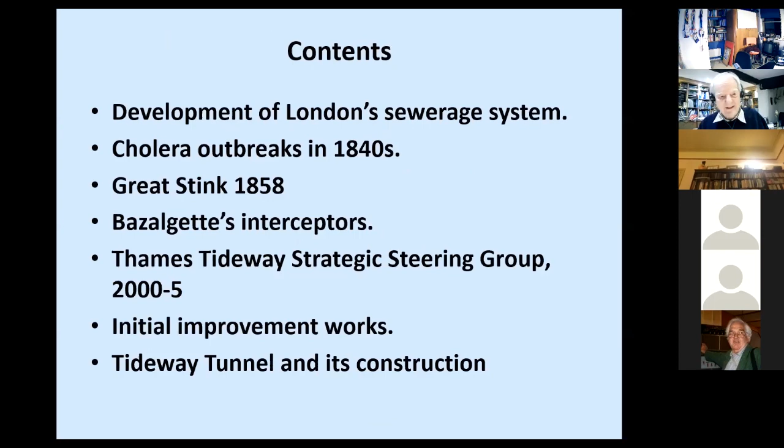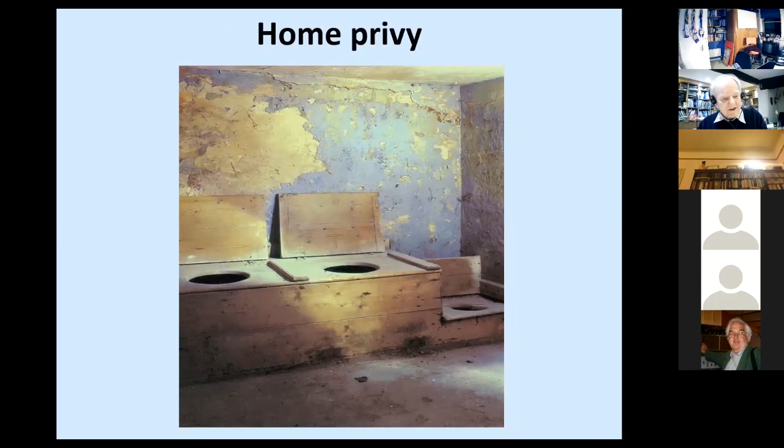In earlier times, some household waste was tipped into the street with a cry of 'Gardez-l'eau' as a warning to passers-by. A modern equivalent might be the cry of 'fore' in golf. Rainwater eventually flushed that matter away. Later, sanitation was effectively by privy and cesspits, some still in use in my youth. The solid contents were occasionally removed by hand, generally for use as manure on crops.

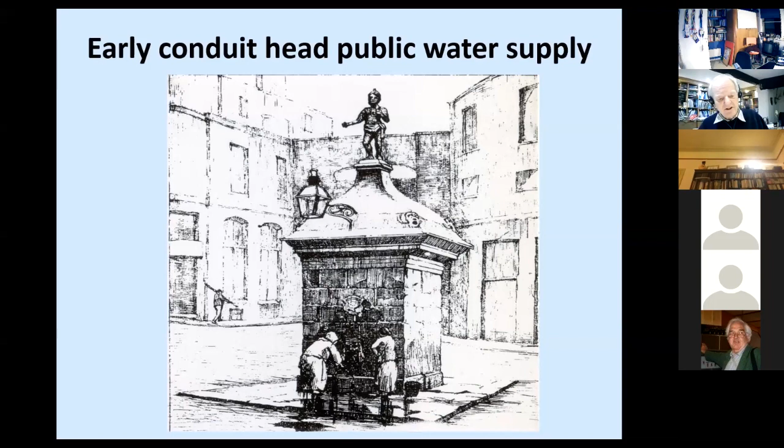Before 1800, water supply for London was generally from springs, wells, or the tidal Thames. Spring water flowed by gravity from a spring on high ground, such as up by Highgate, to a conduit head in a public place. Those who lived at a distance from the conduit head paid water carriers called caddies to bring water to them.

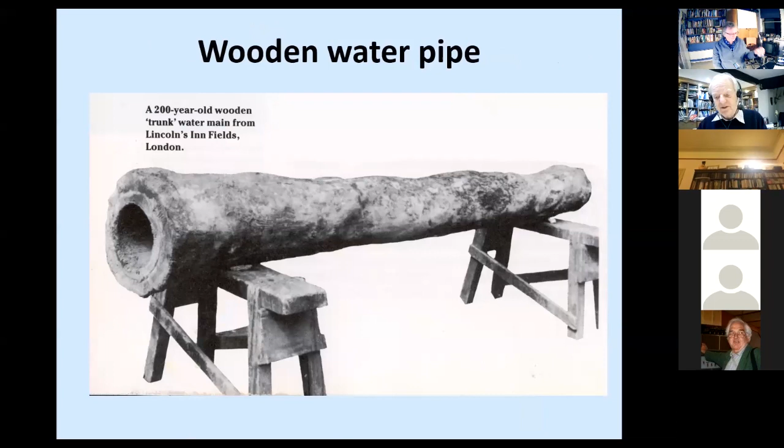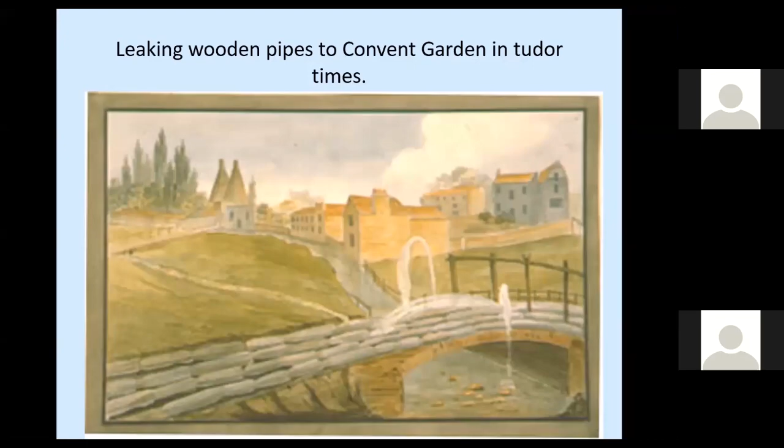By the mid-18th century, several water companies were established to provide water for public consumption. Water quality was often terrible. In 1769, Tobias Smollett remarked of London's drinking water, "The contents are composed of human excrement, drugs, minerals, and poisons, enriched with the putrefying carcasses of beast and men."

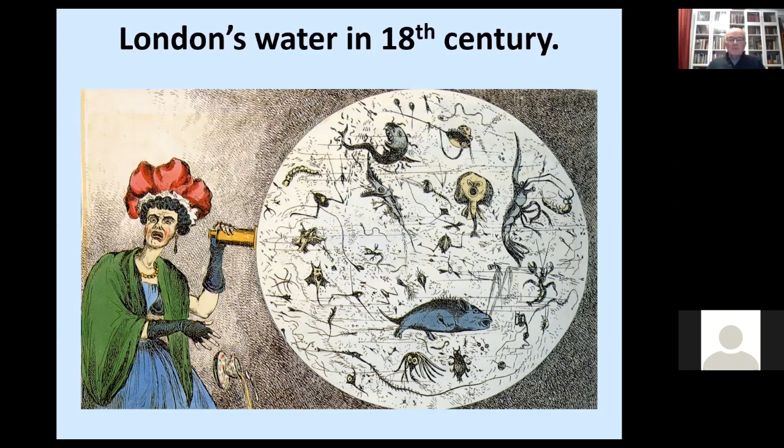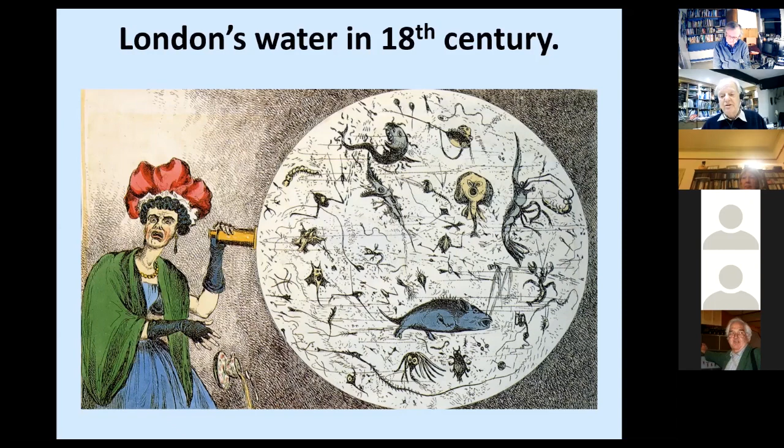In the 18th century, Britain was largely a rural country with large families, few of whom survived to adulthood. Then followed the agricultural revolution, improvements in medicine that meant many could survive longer. And then we had the Industrial Revolution. And all of this resulted in a large population increase and migration to the booming towns. The country's urban population rose from 3 million in 1800 to about 28 million in 1900. So this gives an idea of the pressure that there was on the industrial and urban town society.

The sanitary conditions in the towns rapidly became appalling. The introduction of the water closet on a large scale around 1830, seen at the time as a major advance in sanitation, had a serious impact on river water quality.

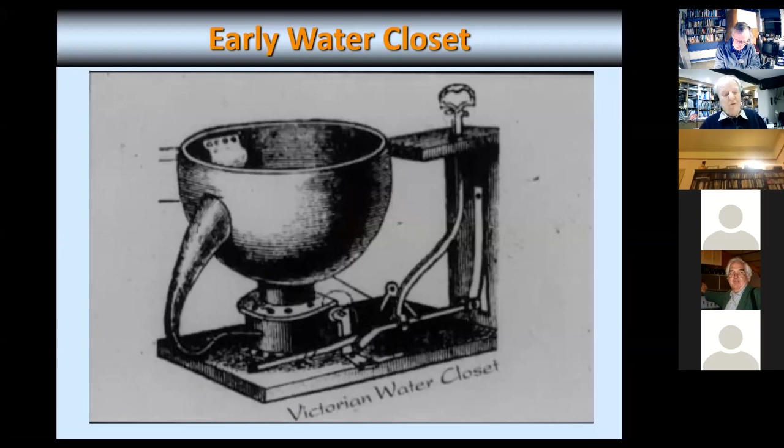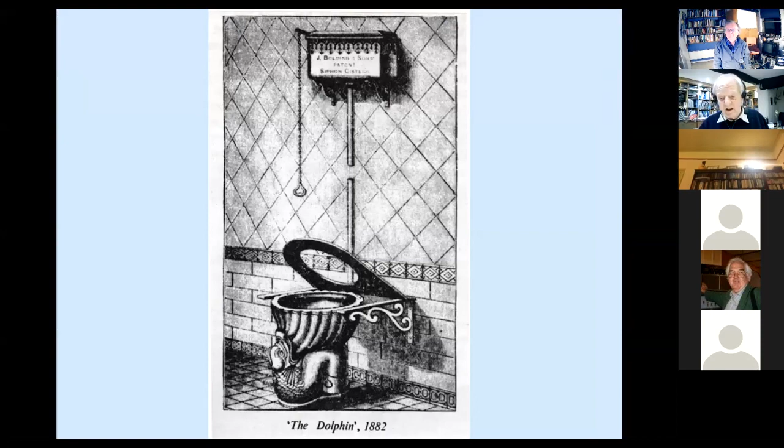At first, the water closets were basically a tank like this with a plug on the outlet pipe. Plugs were never very successful in sealing and used water. The closet contents were discharged to the cesspits, but the increase in water flow made the provision of overflow drains essential. It was not until the second half of the 19th century that Thomas Crapper developed the siphon tube system that you know today.

In 1843, Parliament made it compulsory to connect the house drains to watercourses. Whilst this removed the slops from the street, it meant foul water and storm drainage in the same watercourse. Some of these were then culverted over, hence the combined sewers that we still have today in the older parts of London.

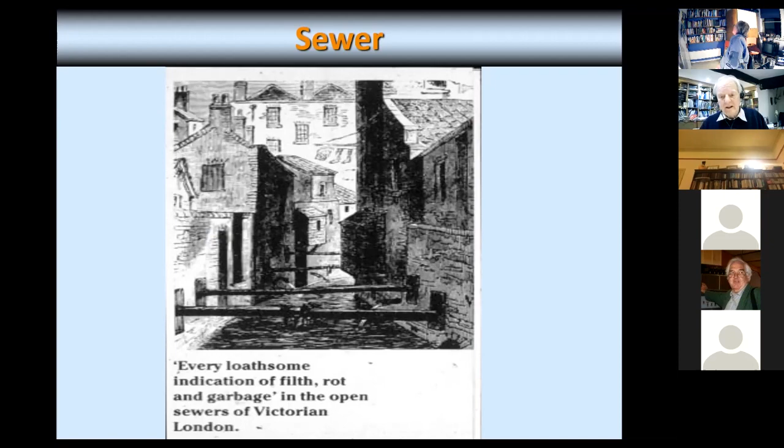Cholera arrived, an unwelcome import from India. It was considered to be carried by miasma in the air. The water closets and sewers put the bacterium into the water sources and hence into the public water supply.

In London, by the 1830s, the pollution of the groundwater and the River Thames was gross. Little of the public water supply was treated, and the spiral of urban waterborne disease began. The result was the cholera outbreak of 1832, which killed some 30,000 people in Britain.

The medical services were unable to cope with the epidemic, and it was soon out of control in the horribly insanitary conditions in which many people lived. For those that could pay, brandy was prescribed as both a preventative and a cure.

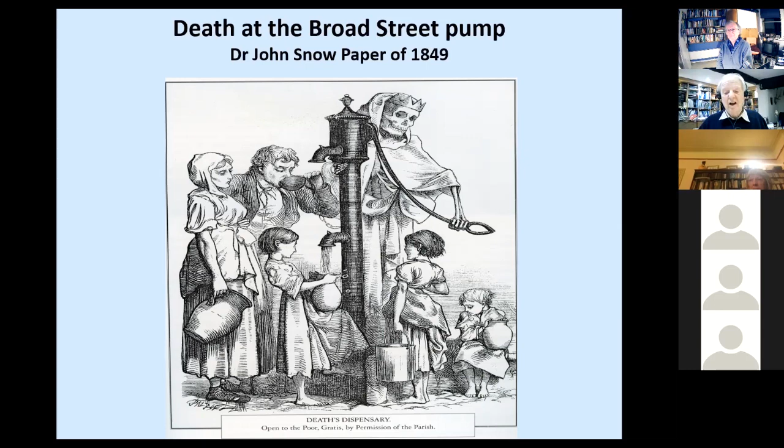Once it was appreciated that diseases such as cholera and typhoid could be waterborne, the need for a good supply of clean water was accepted and an Act of Parliament was passed. The result was that all the water sources in the Thames had to be moved upstream above the tidal limit at Teddington. And this is an image of the Hampton Water Treatment Works.

This used the slow sand method of treatment. It was opened in 1856 and is still London's largest water treatment works.

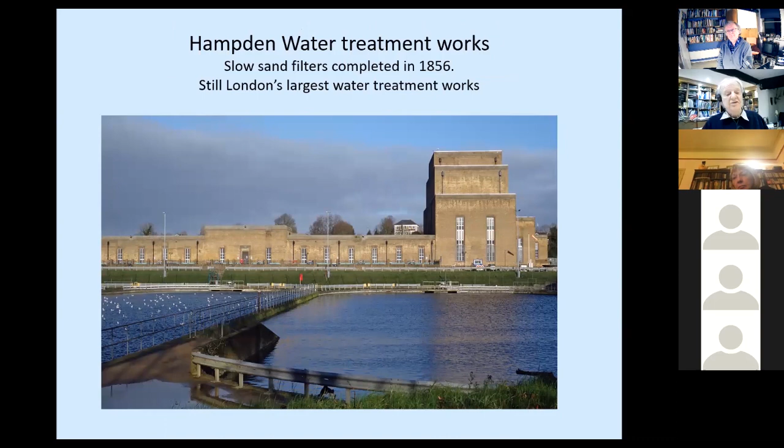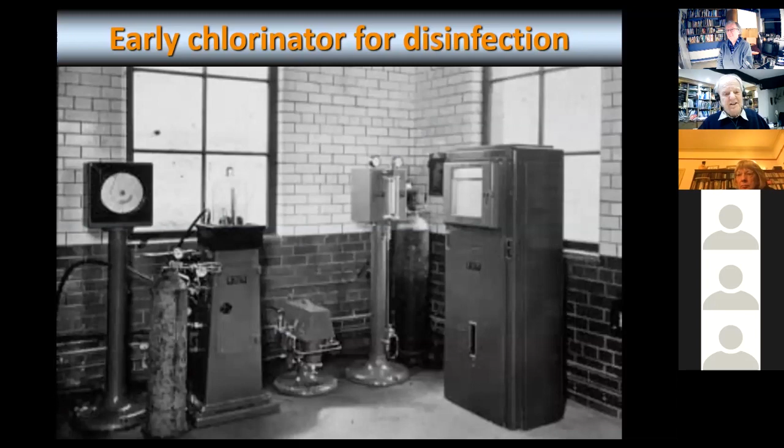Subsequently, it was shown that a small dose of chlorine could provide disinfection. And after the outbreak of typhoid, I think it was in Croydon about 1905, this became obligatory.

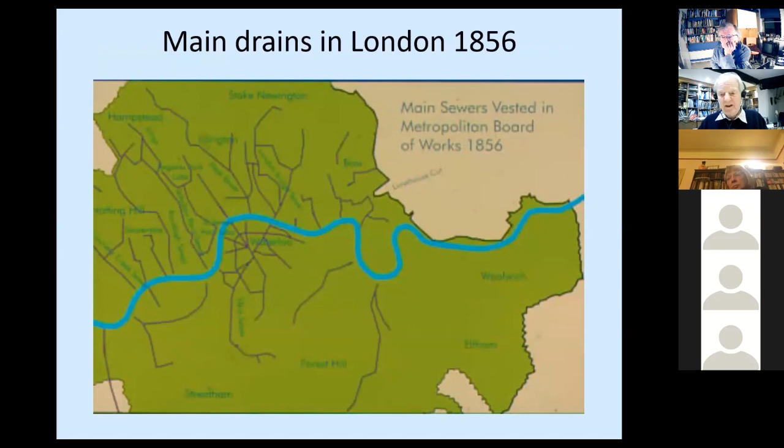Let us now return to 1856 and the many combined sewers and foul drains draining into the Thames. I think you can see many of them there, now all buried underground. With increasing urbanization came increasing river pollution.

In 1855, Faraday dropped his calling card into the Thames, but within 1 inch of the water surface, it had disappeared.

The great stink of 1858 occurred during a hot, dry summer. The tidal Thames became devoid of oxygen over a considerable length. The great stink was so strong that sheets soaked in disinfectant were hung in the windows of Parliament. Even so, it had to recess.

Joseph Bazalgette was appointed to resolve the problem. His far-sighted drainage plan was adopted. There were 5 lines of large sewers positioned to intercept the polluted combined watercourses and convey the sewage and storm drainage to large storage tanks downstream.

These were at Beckton on the north bank and Crossness on the south bank. So you can probably relate with Crossness. Someone once said to me, doctors bury their mistakes, but engineers bury their successes.

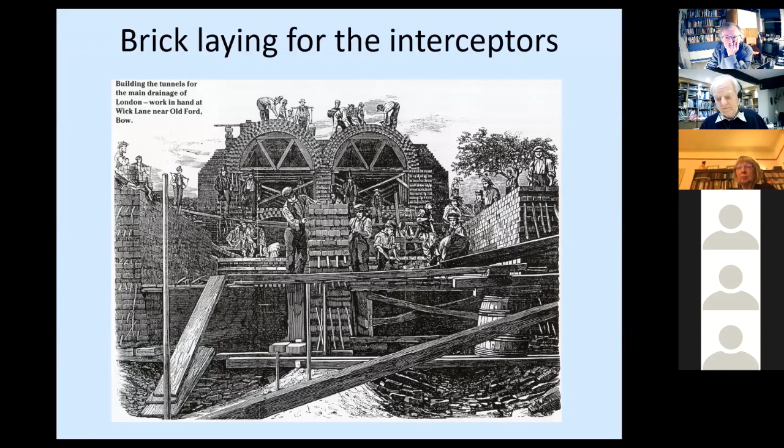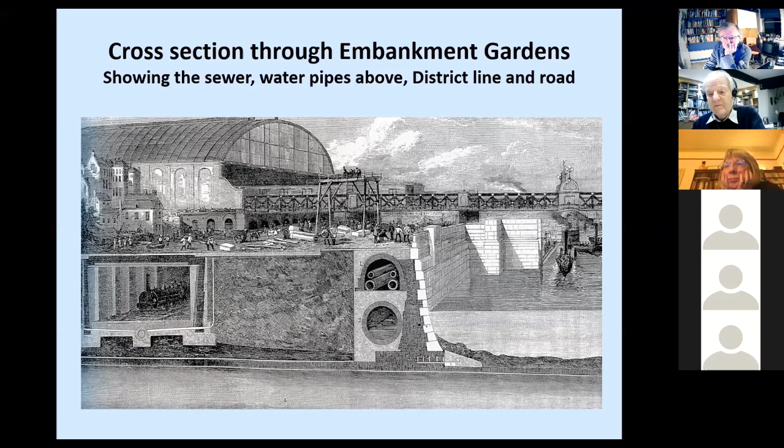Now, since about 1900, new sewers that were used to connect houses have been separate foul drainage and separate storm drainage. So we no longer have new combined sewers.

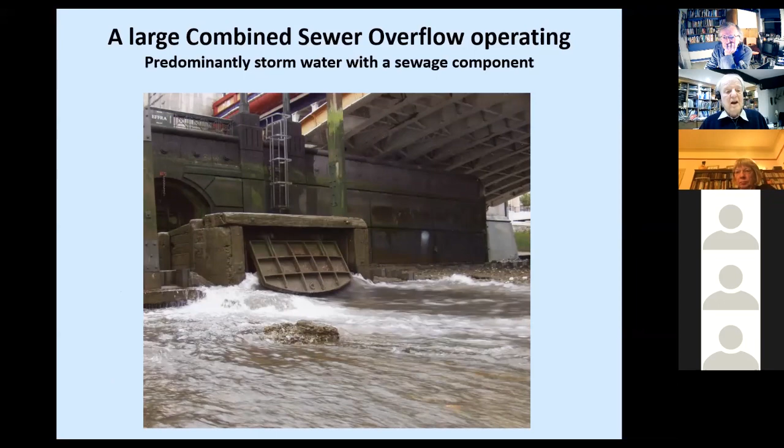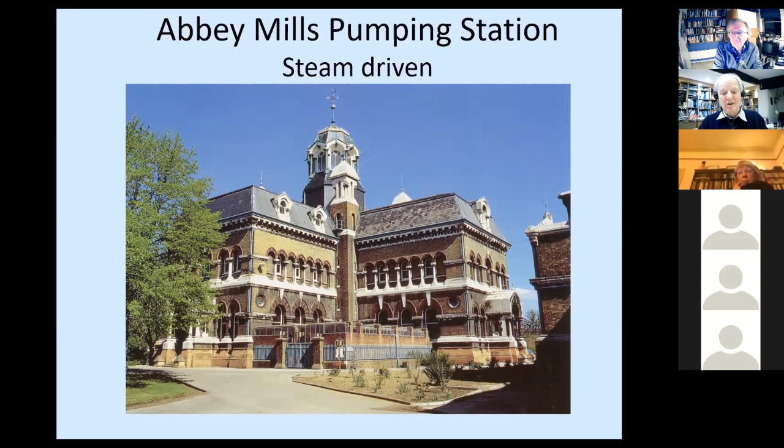Then he also found that discharging untreated effluent into the lower tideway became unacceptable even then. So the first treatment that was put in was lime treatment and precipitation. And from there, the waste, the sludge, was then taken by ship out into the North Sea and deposited there. And that went on until about 1990.

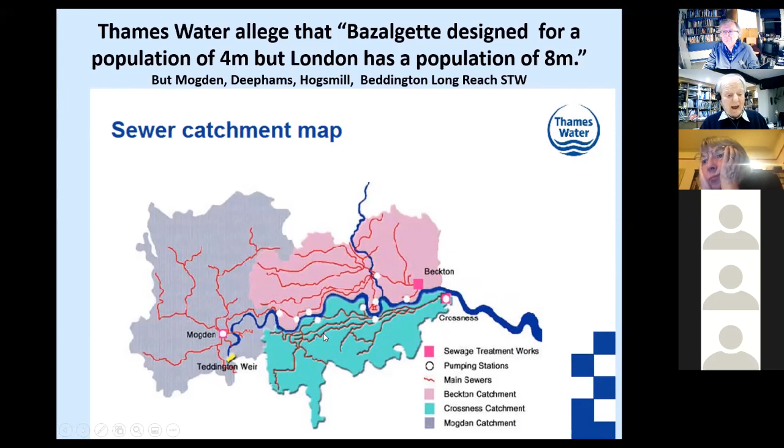North of London, there is the Deephams sewage treatment works, and it collects all the sewage from North London. There's the Beddington sewage treatment works down in the south, and Longreach over in the east. So that gives you an idea that we're going to be talking predominantly about the Beckton and Crossness sewage catchments.

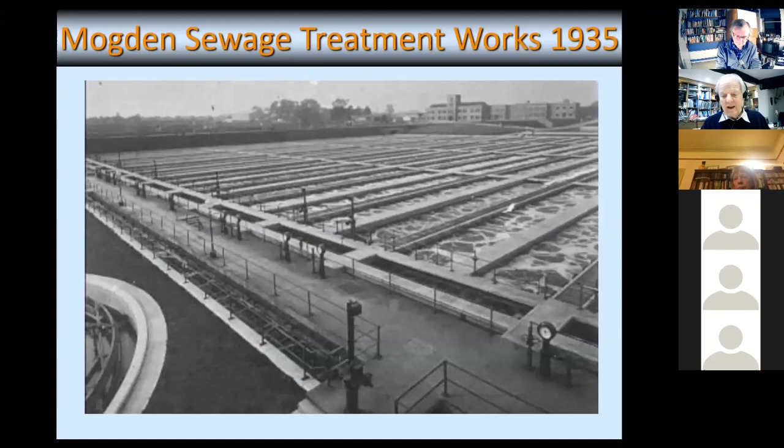But first, this is an image of the Mogden sewage treatment works as it was built. This used a new form of treatment, the activated sludge system, put in in 1935, and it's still working today.

Then we have World War II and heavy bombing by the Luftwaffe, which damaged the water pipes and the sewerage system. So a lot of the sewers then discharged directly into the Tideway.

My colleague in chat is saying, oh, is it bandwidth problems? Let's go this way. Shall I go on now? Excuse me, there's somebody talking and I can hear them over Chris. Can you mute your mic, please, and let Chris speak? Thank you. Okay, Chris, go ahead.

Then gradually, as the bomb damage in London was repaired and extensions were made to the system, the water quality, the dissolved oxygen water quality, did actually improve.

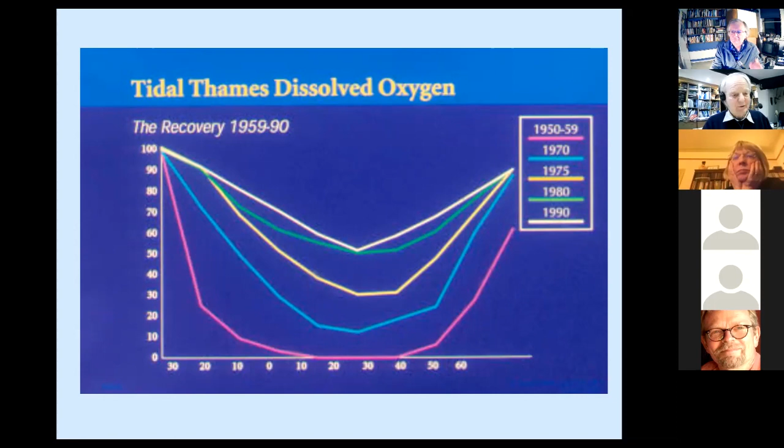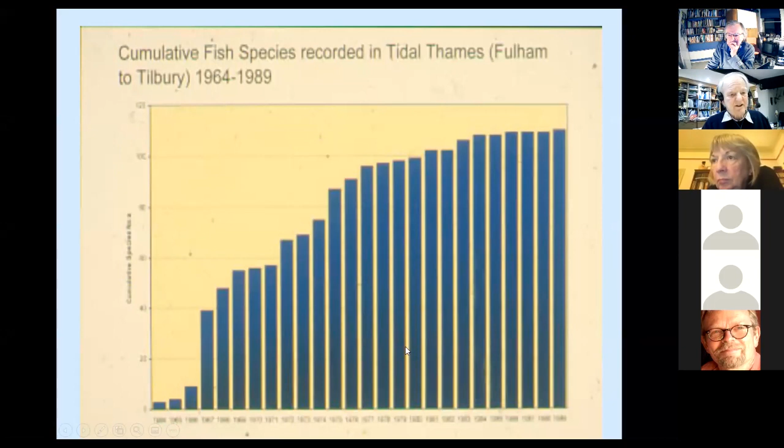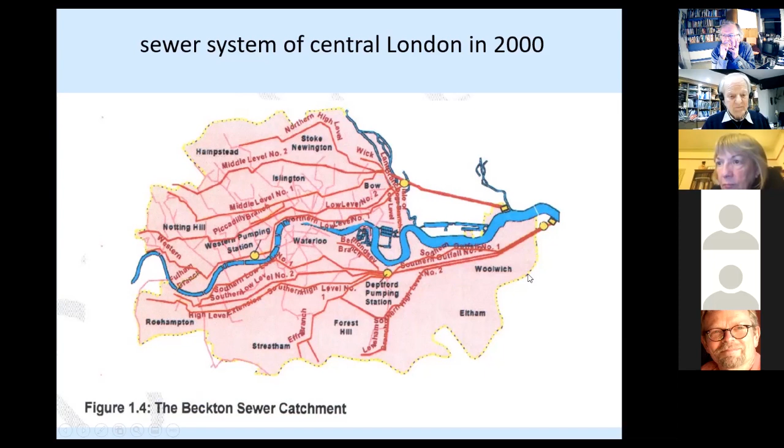We then have the Urban Wastewater Treatment Directive of 1991. This concerns the collection, treatment and discharge of urban wastewater. It's quite a thick document, but I've just taken 3 or 4 phrases out of it. Sewer overflows may occur under conditions of unusually heavy rainfall. Measures shall be taken to limit pollution from sewer overflows, and all member states must conform by 2000.

And there are two aspects about that: we've already seen that we didn't conform by 2000. Now, you need to note the directive does not set specific pollution levels in the receiving water, and it does not set the number of spills allowed.

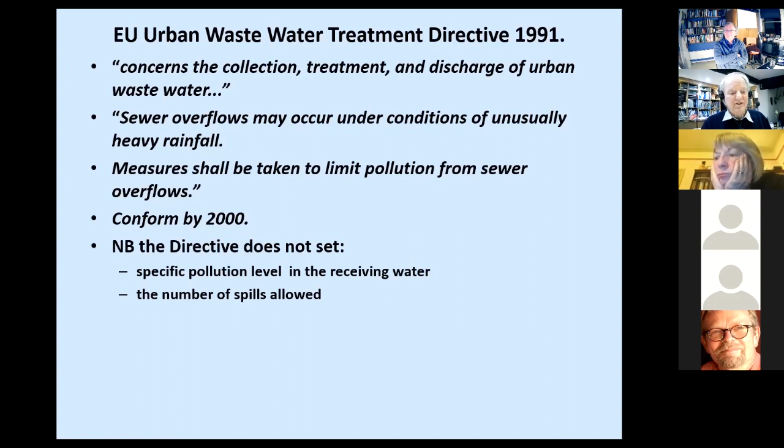So what were the conditions then? All the interceptor flows were treated to secondary standards at their discharge points at the sewage treatment works, but there were 57 combined sewer overflows. The spill is storm water with some sewage in it, and as the storm continued, the amount of sewage in the spill water decreased.

So when you saw that CSO, it was spilling mostly stormwater. The spill frequency was believed to be from minimal to about 60 spills a year. Spill volume was thought to be about 40 million cubic meters, but about half came from the Abbey Mills pumping station, which was not capable of pumping sufficient forward flows.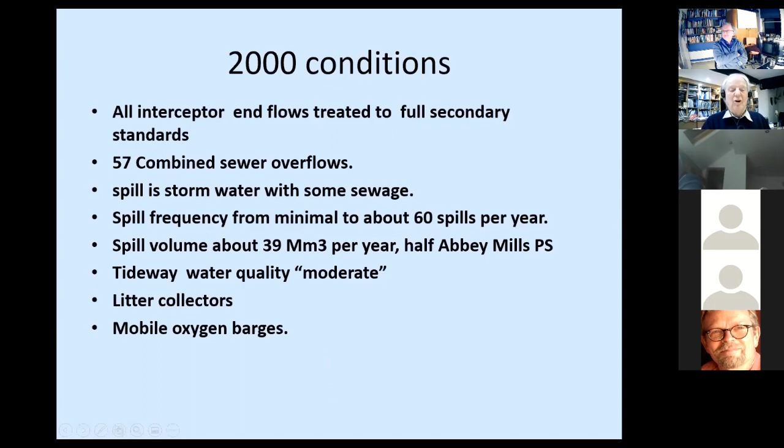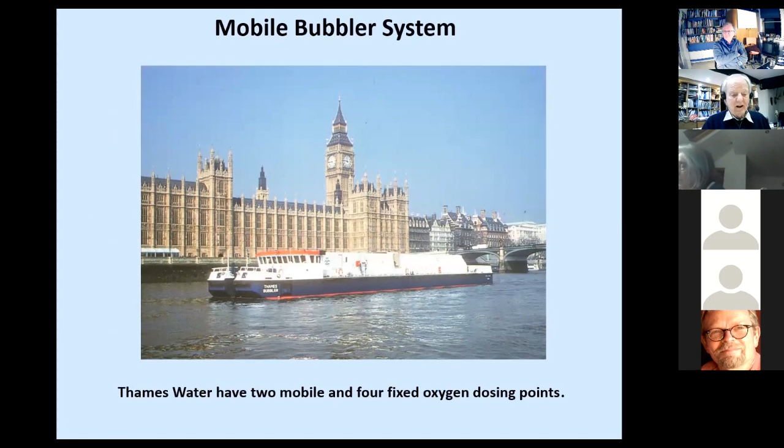Because the country had to meet the Urban Wastewater Treatment Directives by 2000, we formed a steering group with representatives from DEFRA, the Environment Agency, Thames Water and Ofwat, and I was appointed as the independent chairman. We spent 5 years looking at this, and we reported in 2005.

So what did we actually look at? Well, the things we were concerned about were the health of the users of the Tideway, the ecology in the Tideway, and the spill frequency into the Tideway.

Considering the health aspects, the Tideway is not a designated bathing water, so the bathing water directive is not applicable, and there's no statutory requirement for bacteriological standards. For navigational reasons, with ships going up and down, the Port of London Authority had banned swimming in the Tideway except with a specific license. We found the users to be the 5,000 rowers in the Hammersmith and Chiswick area, and we did a health survey of the rowers, which showed very little impact - they were more healthy than the general population. So there wasn't much demand from the health aspect.

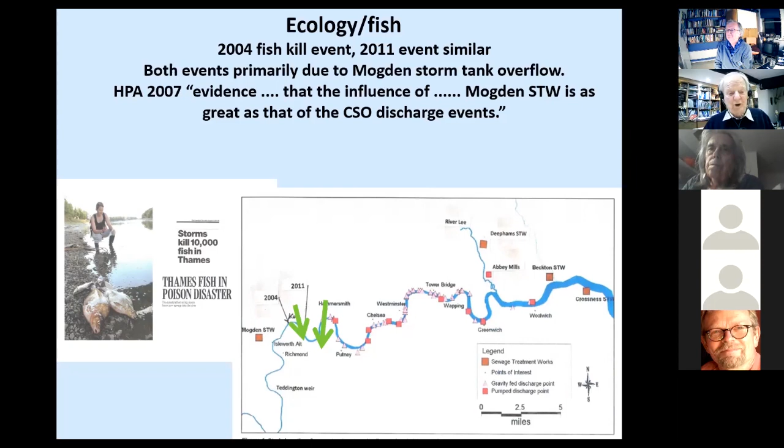So we came up with the initial improvement works. First of all, there were the 5 sewage treatment works - all had their sewage treatment works upgraded, their storm tank capacity increased, particularly at the Mogden works. This cost about nearly 700 million and was completed about 2014.

The second main interim work was what's called the Lee Tunnel, which connected the Abbey Mills pumping station through to the Beckton works. As I said before, something like half the overflows into the tidal Thames came because Abbey Mills had not got the capacity to pump sufficient forwards. So that reduced the spill amounts from 39 million cubic meters to 17 million cubic meters, and that improved the water quality of the lower Thames considerably.

That tunnel, which was very similar to the actual Tideway Tunnel, cost 635 million and was completed in 2015.

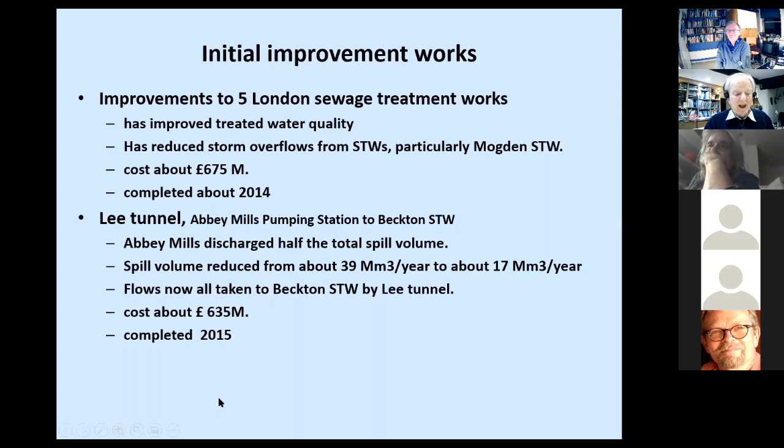One of the things done as part of the original study was to establish dissolved oxygen standards based on fish trials. We tried different types of fish that were in the river under different conditions and saw how they performed. We then established 7 automatic water quality monitoring points along the Tideway. Since the completion of the Mogden sewage treatment works, the Lee Tunnel, and the other improvements to the sewage treatment works, the Tideway has met all the dissolved oxygen standards.

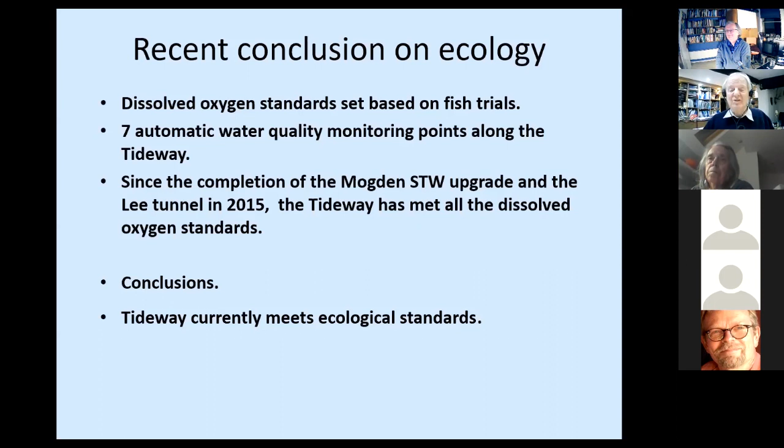Conclusion: the Tideway meets the ecological standards that were set for it. So we may well see more of this in the future.

However, the UK was taken to the European Court of Justice by the European Commission because it was thought that it was not meeting the Urban Wastewater Treatment Directive. These are some quotations from the proceedings of the European Court of Justice.

The European Commission does not propose a strict 20-spills-per-year rule, but points out that the more overflow spills, the more likely it is that the overflow's operation is not in compliance with the directive.

Understood, but the 20 spills was a new feature and is not in the directive. The European Commission leaves the decision on the number of CSO discharges to member states to determine an acceptable spill frequency depending on the local situation, and in particular the status of the receiving water.

The Environment Agency said: provided spills have not caused a significant adverse impact on the quality of the river, the overflow is regarded as satisfactory. Therefore, what is the issue?

Whatever - in 2012, the European Court of Justice found the UK to be in breach of the Urban Wastewater Treatment Directive at London. So, we're in breach.

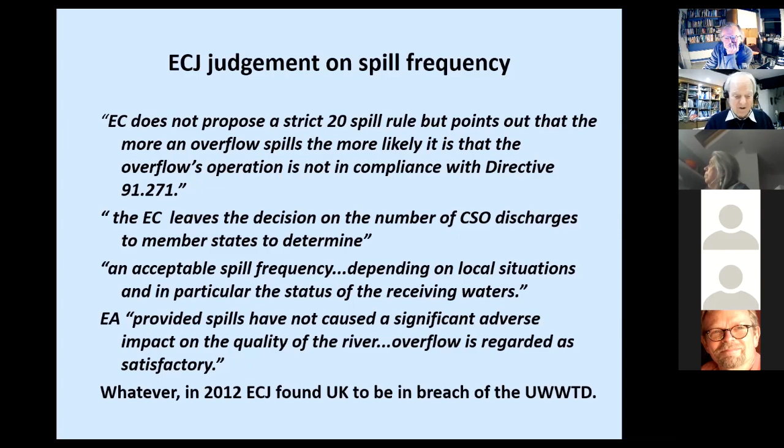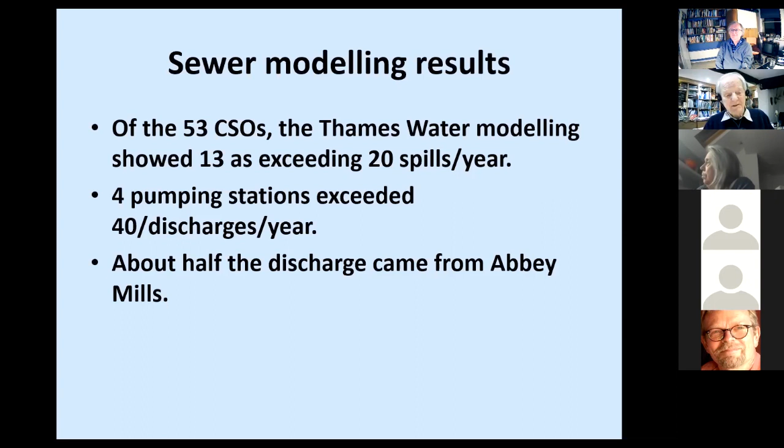So what are the actual results of the sewer modelling? Of the 53 CSOs, Thames Water modelling showed that 13 were exceeding the 20 spills per year guideline. 4 pumping stations exceeded 40 discharges a year, and about half the discharges came from Abbey Mills pumping station, which was dealt with.

So we're now back in 2003. So what particular solutions did we look at?

We considered splitting the combined sewers into separate stormwater and foul drainage systems. The problem was that meant digging up every street in the Beckton and Crossness catchments and putting in a second set of sewers. That would have been very expensive and caused enormous disruption, so we said that was not an acceptable way of going.

Could we reduce storm runoff into the sewers by using sustainable urban drainage? The problem is it requires quite a bit of land to hold back the stormwater, although it would now be considered much more favorably. Back in 2003, it was a new technique which hadn't really been developed, and we did not feel confident in being able to recommend that.

Ditto for local storage. The problem in these catchments, Beckton particularly in West London, is there is very little place where you can put in storage.

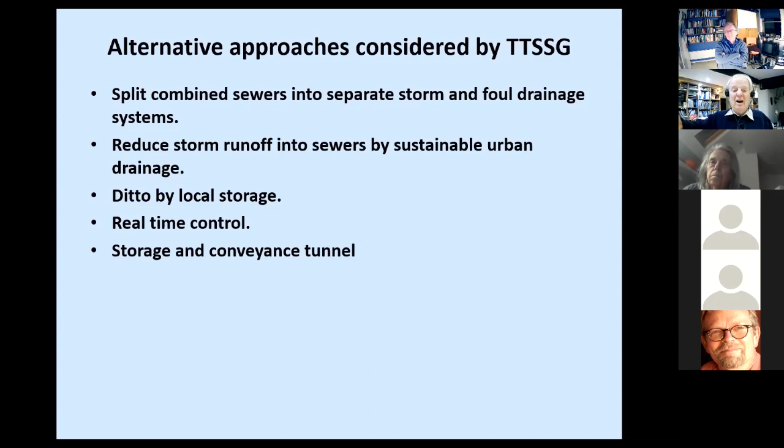That meant these CSOs spilled into the tunnel, were stored there, and were then conveyed down to Beckton, where they were pumped out after the storm and treated in the enlarged works.

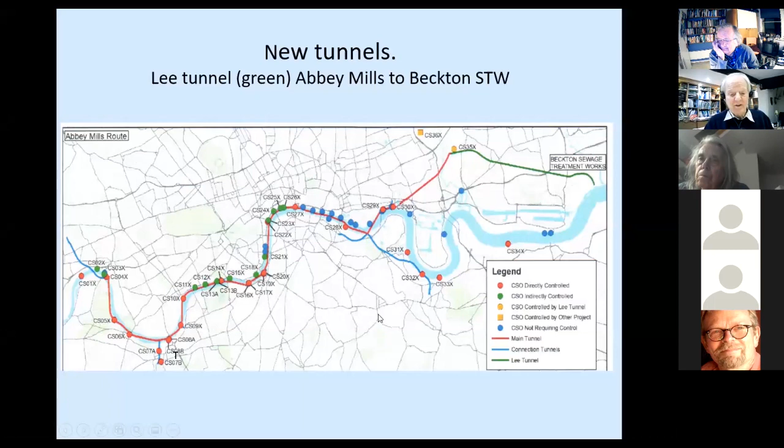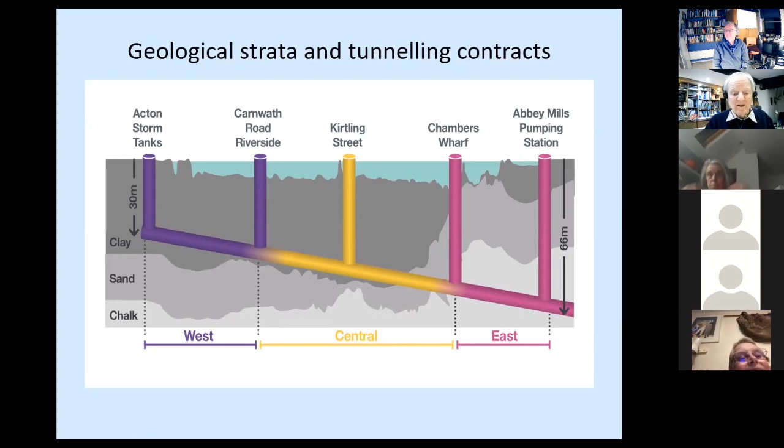Then down in the pink section, you're in the chalk - again a very good tunneling medium, but it carries water in places and at times, so you need a different type of tunneling machine down there.

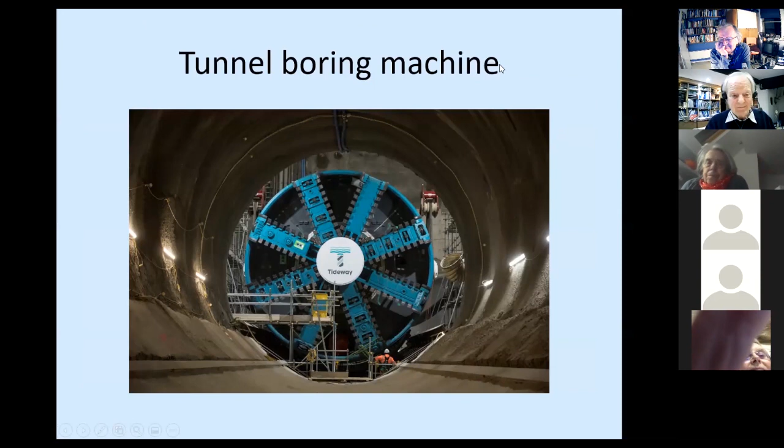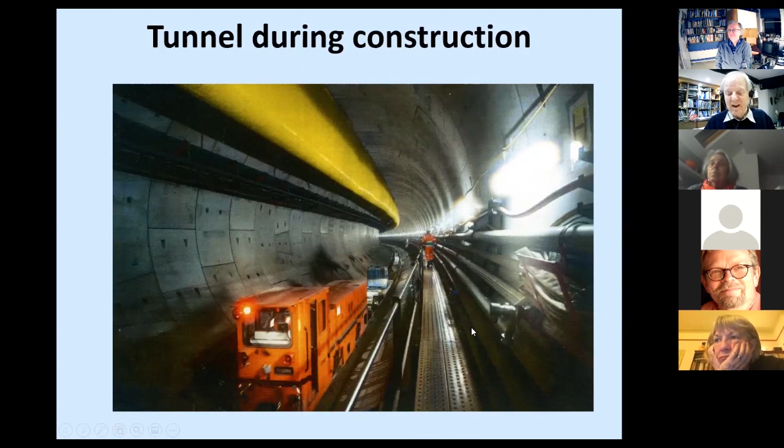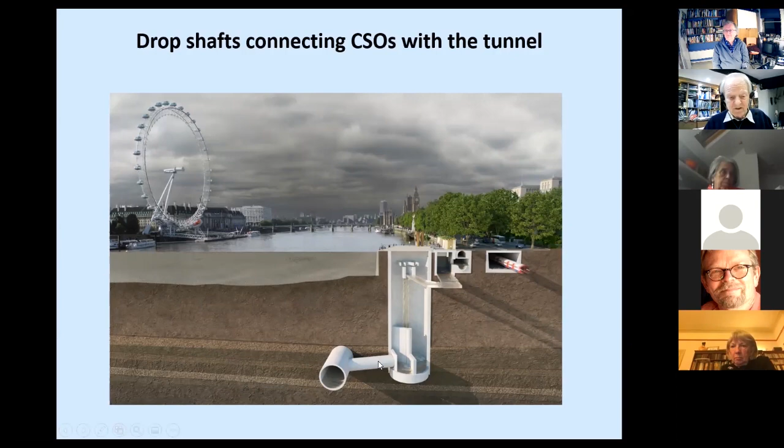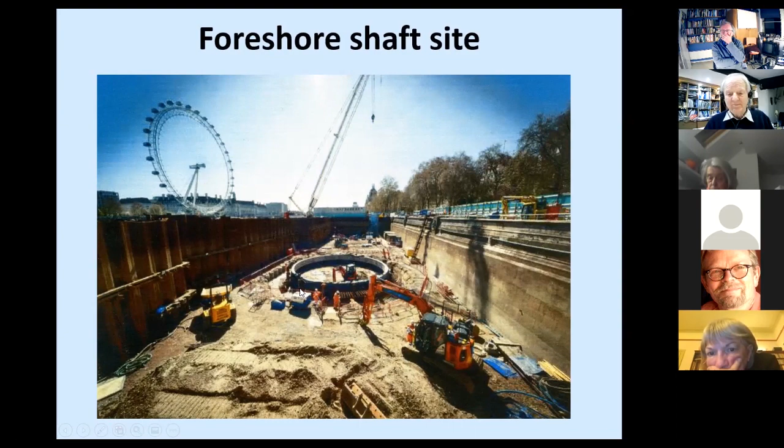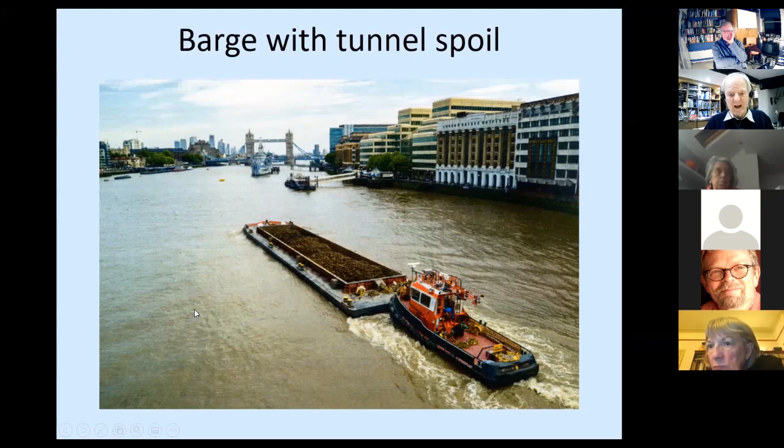So what's happened to the spoil? Well, we were very insistent that the spoil should be taken out by river. So here we are, the barge with the tug pushing it, taking the spoil away downstream for disposal elsewhere.

So what are the features of the Thames Tideway Tunnel? It's a soundly engineered scheme. There will still be about 4 spills a year. The tideway will still stay at moderate water quality, because we're not doing anything about the phosphates discharged from agricultural land up in the catchment. It will still look a reasonably muddy river, because that's the sediment churned up by the river in its passage backwards and forwards. Not going to be complete till about 2023.

The cost, I've identified it there, the total cost of the scheme is about 5.5 billion. It will raise your bills by about £25 per household per year.

The use of energy at the time we recommended this was actually much less important then, but it will have to raise something like 18 million cubic meters a year from about 60 meters down. So there's probably about 10 million kilowatt hours per year of electricity used in the pumping.

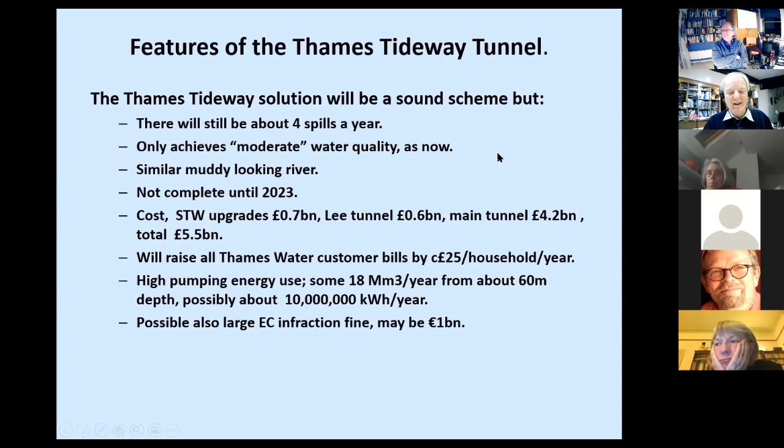The other thing is there is a possible large infraction fine from the European Commission. I'm not up to date on this, but for not meeting the directive, every member state is fined, based upon the impact during the period, the length of the period, and the prosperity of the state. I'm not aware of specifics, but we are likely to be fined somewhat for that.

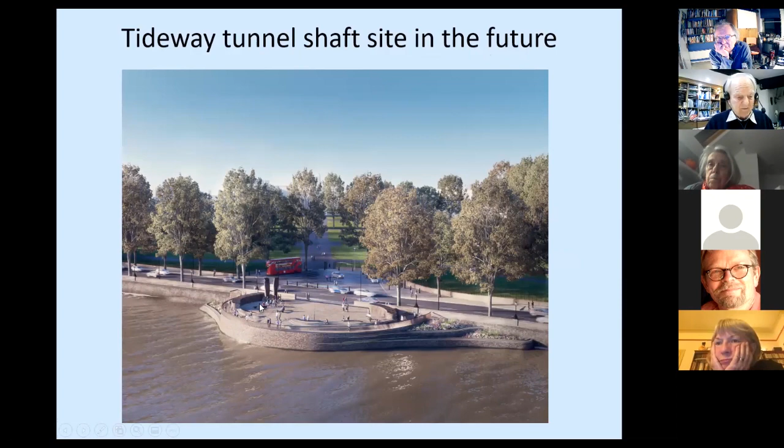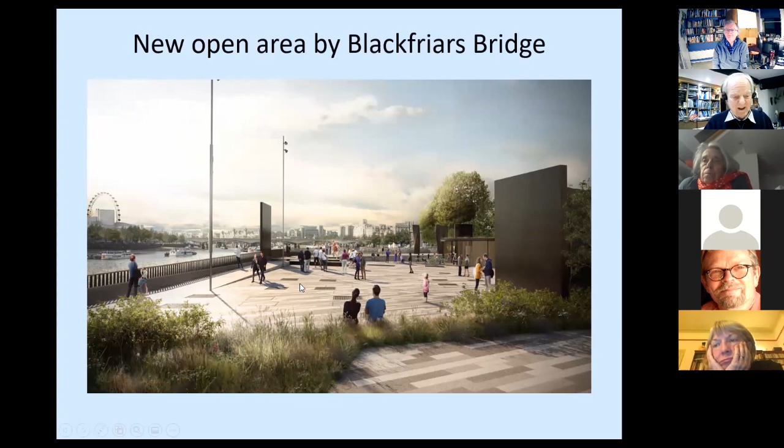So this is a conjectural view of how the Thames might look in the future. It's subject to PLA approval, of course.